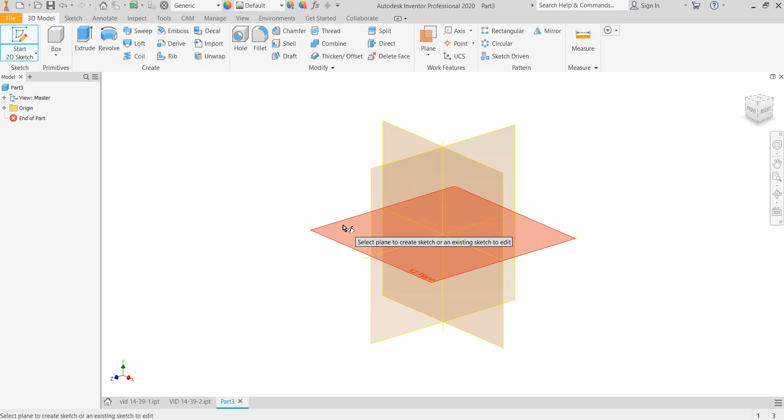Part number 3, the bracket at the bottom. And this one, of course, we draw it on the top plane. It's the easiest way. And there was the flip of the view cube. Okay, so we're going to start this one with a couple of circles. Okay, and then a rectangle.

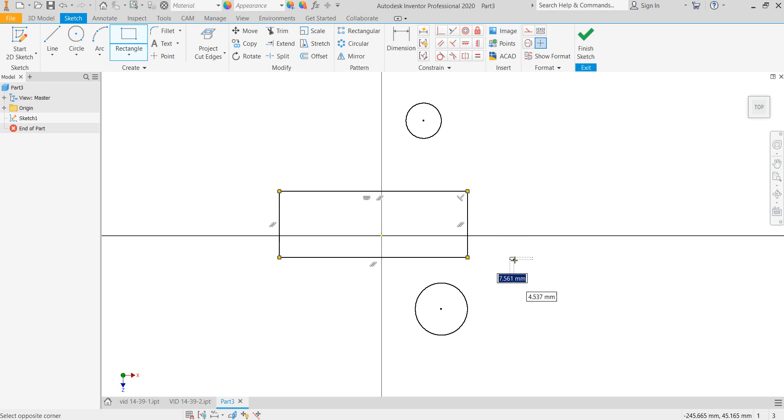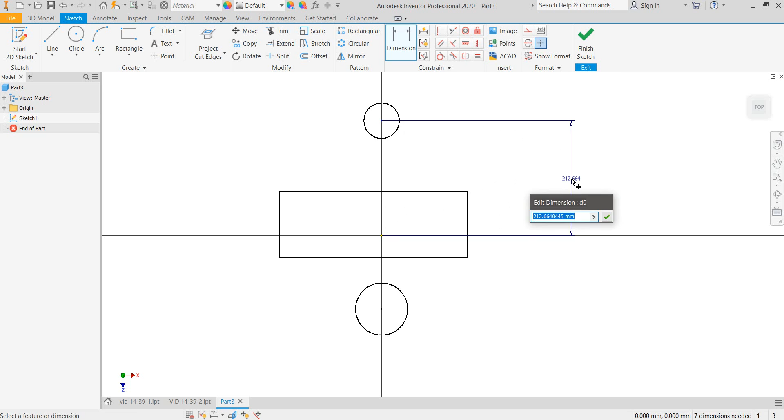Now let's constrain our circles here. Let's see, what verticals work? I think, yeah. So we'll do some vertical constraints there. We need dimension. Okay, and those are like way too far out, my gosh.

Okay. Of course, we need a diameter dimension on the circles. We need a dimension on the side of the rectangle. And then we also need dimension on the overall size of the rectangle.

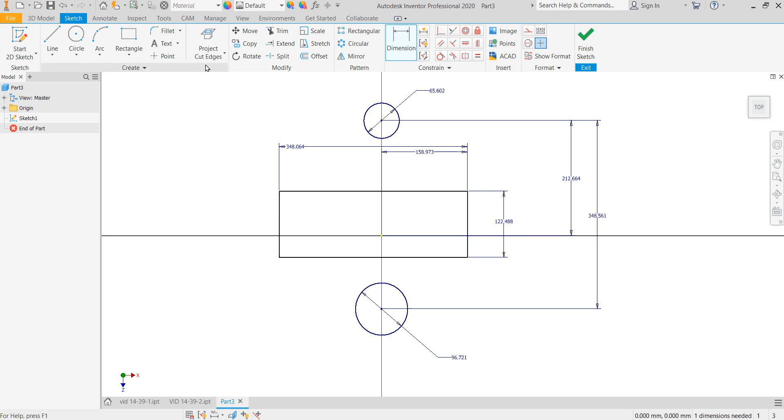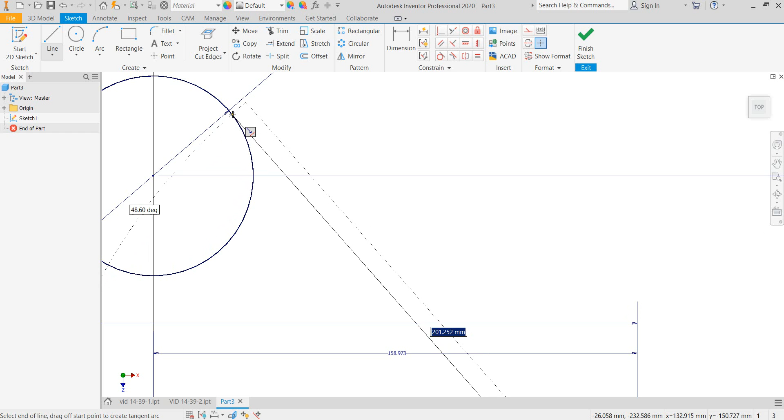Okay, now what we're going to do is draw lines from the corners up and make them tangent onto the circles, waiting for the tangent snap, waiting. Oh, there it was. It's hard to see if you're not paying attention for it, because it's right under the cursor, which you can place it and then come back and constrain it on there.

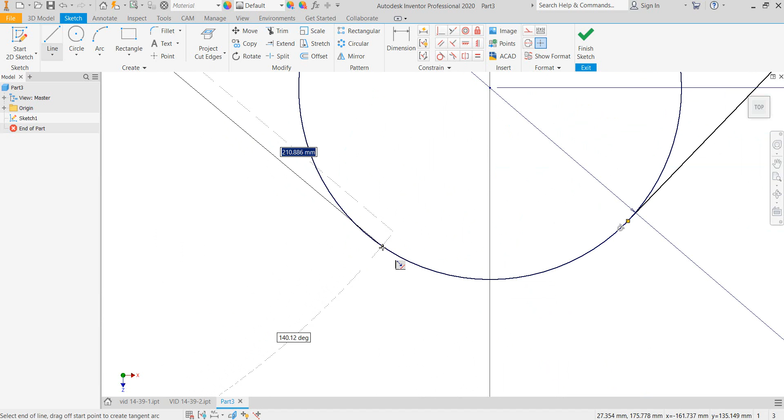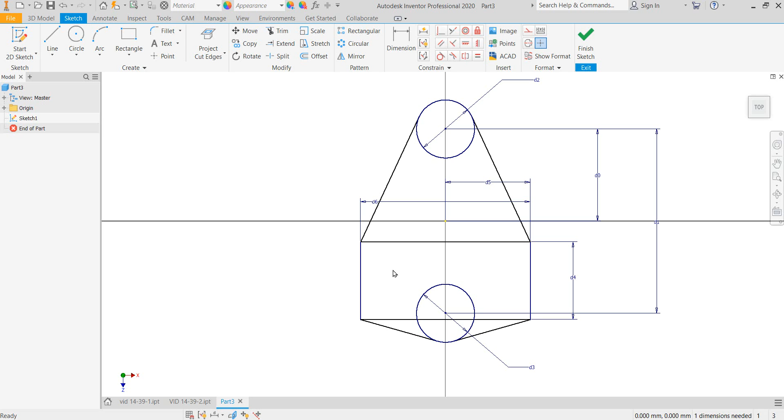Okay, and then some trimming and dimensioning, and I think that will get our shape back to the correct size. You do those things, I'll do those things, and we'll come back together. I placed all my dimensions, and this is the shape that I got, because I forgot about getting the rectangle centered up. So we could do a horizontal and go midpoint of that line. That would work.

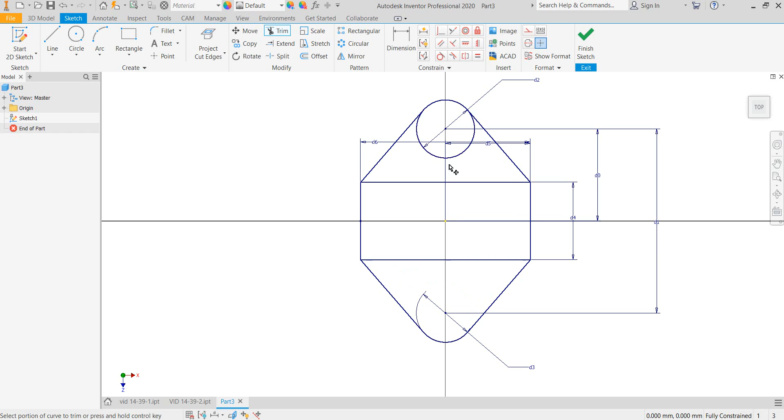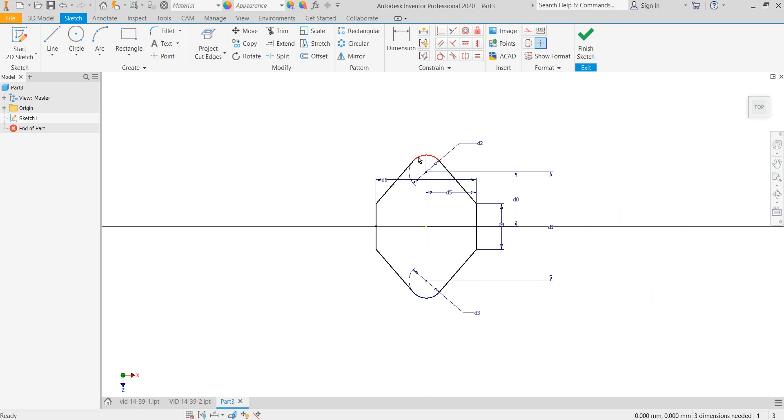Okay, now when we trim, we may have to apply some more constraints, or we may have issues because of dimensions. Yep. Yeah, I figured that. So one way I dealt with that a while ago is just try and move this thing.

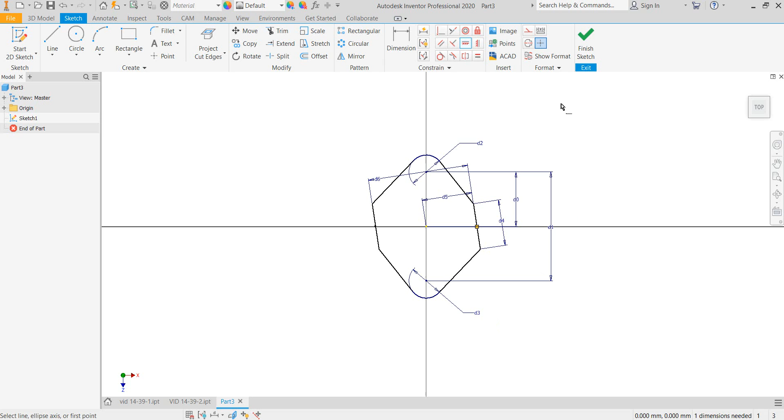Okay, so let's go with an equal. There. Still says I need 2. Aha! This is a problem with rectangles and then exploding them as they lose that vertical thing. All right, so there we go. And so we'll extrude that to the thickness given in the book.

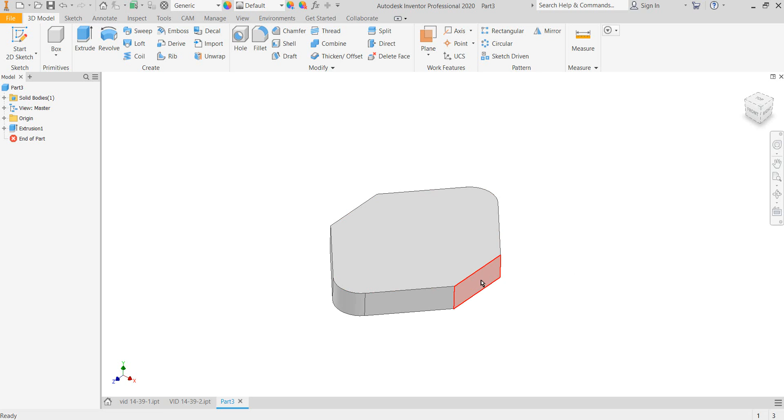Okay. And now the next two, the verticals, I'm going to do a sketch on this side and create one side and then mirror it over to the other side. It's easy. You can do that. Okay. Right. So I got one side sketched and extruded. I mean, it's an easy piece. This one has threaded holes in the backside. So let's go ahead and do the hole and then we'll mirror it.

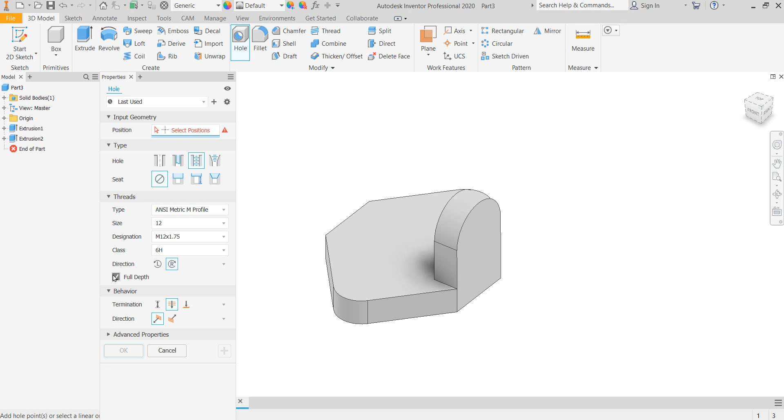Let's see. It is an M12. Okay. So it's a threaded hole. We change over to our metric screws. Go to a 12 by 1.75. Is that correct? That is correct. And we can go through all since we've just got one part, and it is a full depth thread. So I'll go over here and pop it and make it concentric. Okay.

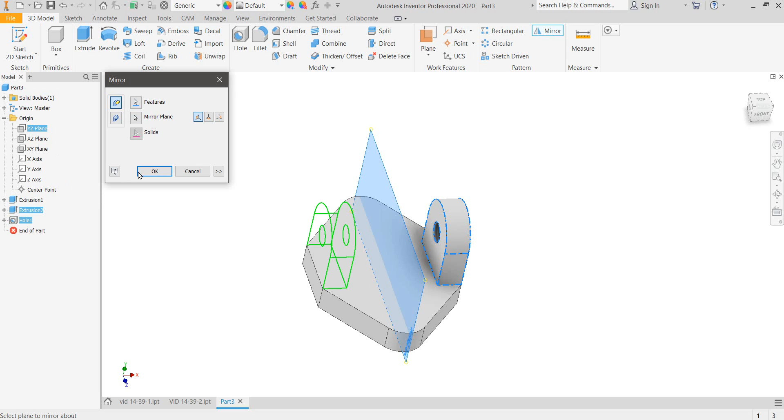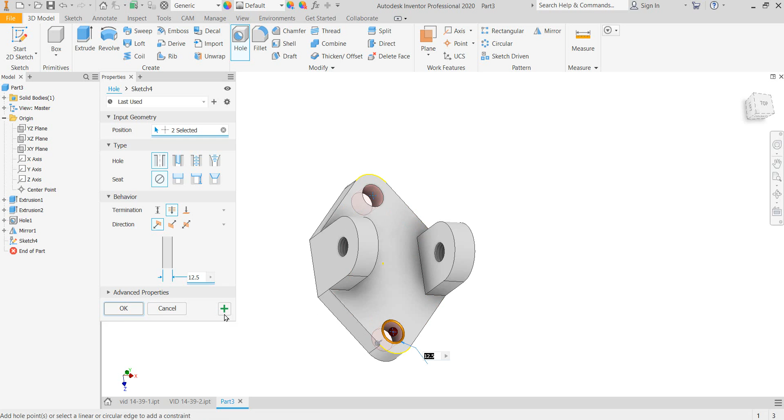And now I can mirror both of those features about that plane. Awesome. And then put a couple of holes in the top. What do we got? 12.5s. Okay. And then fillets are all R3s.

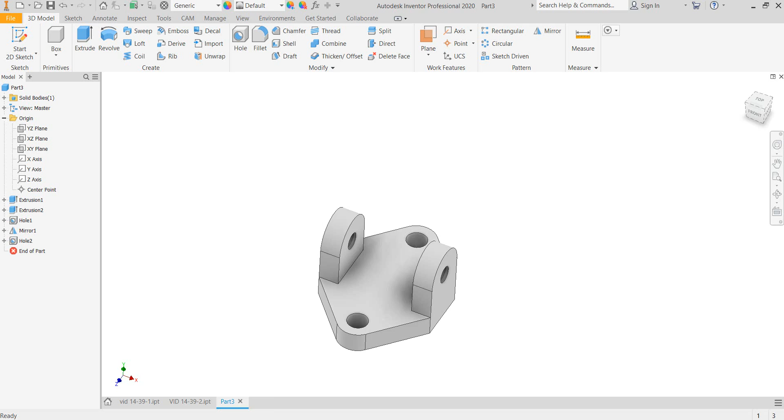Okay, so we're going to fillet around. The bottom is machined finish because it'll be mating against another part somewhere in the world. So you can put your fillets in, and it's a pretty simple fillet thing. Okay, so fillets, we got holes.

I applied my cast iron material type, did my finishes to the two drilled holes, the two sides and the bottom, added the name bracket in my iProperties for the title, and saved it as 14-39-3. And there you go. That's that part. So I'll get ready for the next one.